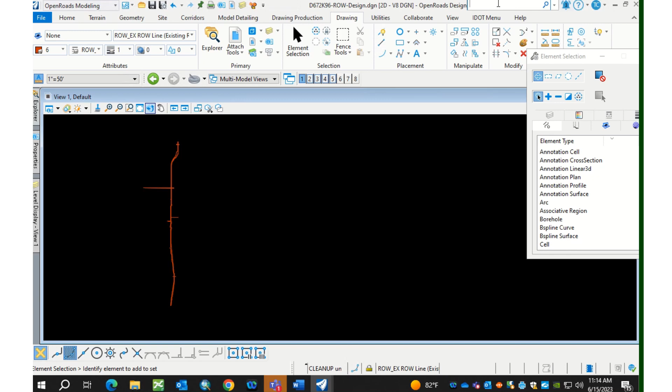All right, generally when I bring in the right-of-way, the lines aren't connected very well. So I found this tool from SS10, I went and looked for it yesterday. It's called Design File Cleanup, and it will help you connect all these lines together.

Generally the first thing I do is go into overlaps, make it a color I can see. Not that one, I make the weight nice and big. Same thing with the gaps, yellow and green. I usually start with one at a time.

So duplicates, hit apply. It will do nothing... alright, there we go. So there's a duplicate there, we can just delete that line.

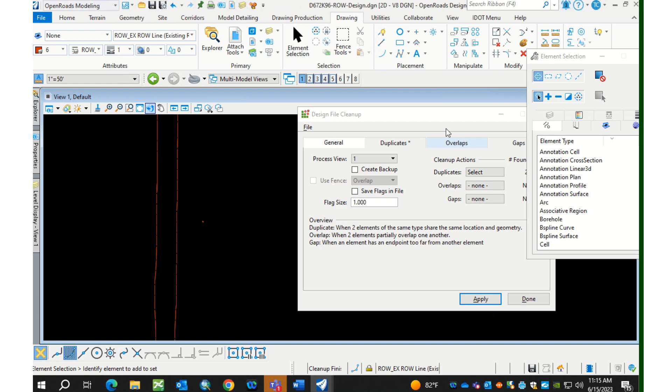Now if I run it again, it should go down to 0. That's done. Next one, overlaps. I flag these, apply. Just find all the green spots.

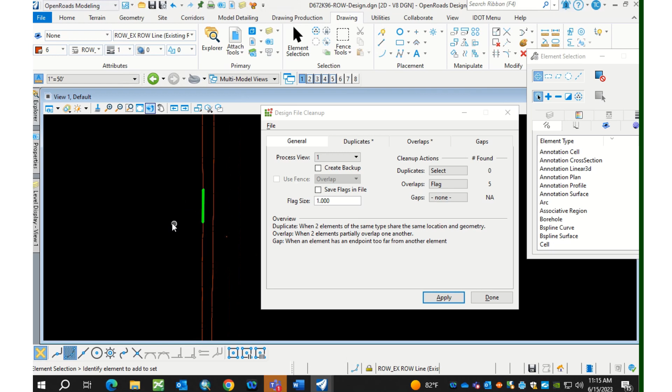Let's see here, I think that was actually a line I just drew. So that one's done, apply, you see that it's done. Go to the next one. I generally do this before I combine all the lines and everything.

So here's the trimmed intersection. They stick out pretty good here, so you can just kind of do them all, hit apply, down to 2. You get the idea.

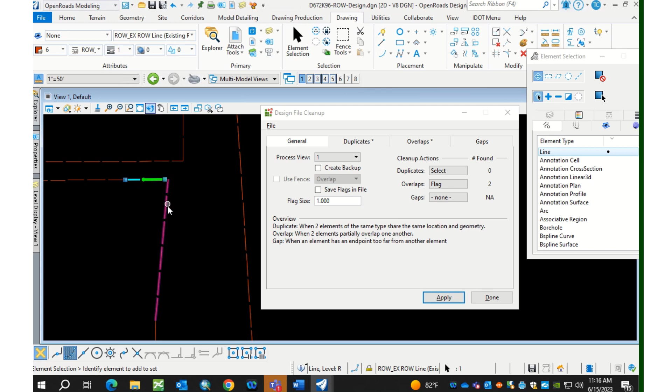Apply. That one didn't fix. Why not? There we go. That's why you got to check it.

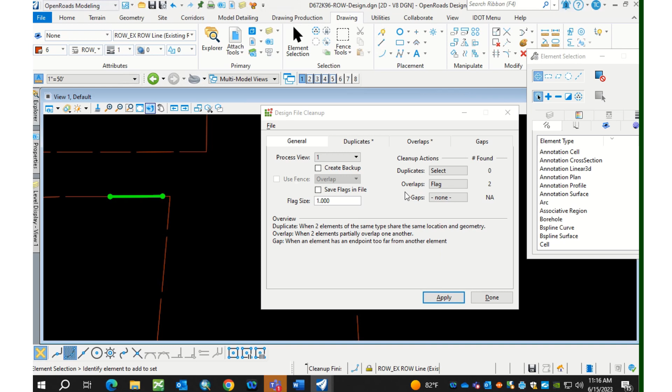Yeah, it seems like a great time saver instead of zooming way in. There's always going to be these gaps when you're trying to close something and it won't close. And then you go to the next one, flag it, apply. There's 18 of those. I'm not going to fix all those, but you get the idea.

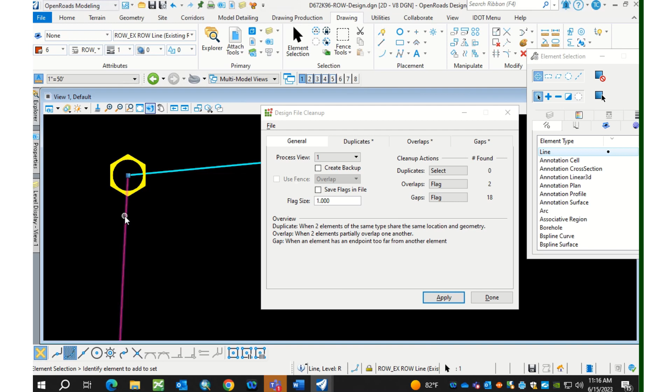Just come to each spot and find out why it's doing that. It could just be, sometimes there's like a dot there you just got to delete. Otherwise, just connect your lines there. Go through all those. When you get 0, you're good to go, and you can connect your lines without any problems.

Good? Any questions? Can this work on profile view as well? I've never tried it there. Okay, seems like something to try though. I don't know how well it works with the new geometry lines. Mostly the old CAD stuff is kind of what I use it for before I connect anything.

Any other questions I don't have answers to? Is it design file?

Perfect. Tom, anything else? All right, you got to choose between door 1, 2, and 3. A new car. Okay, so we'll go ahead and move on. Thanks, Brad, for that.

Okay, looks like on my outline the next thing I had was aerial images. For quite a few years now, the aerial images have been available. The whole state is flown every 3-5 years or so. And so you had this grid that you could bring in, and all the aerials were on the W drive. You find the grid number, reference it in, and then you had this nice aerial in the background so you could compare the topo to it, things like that.

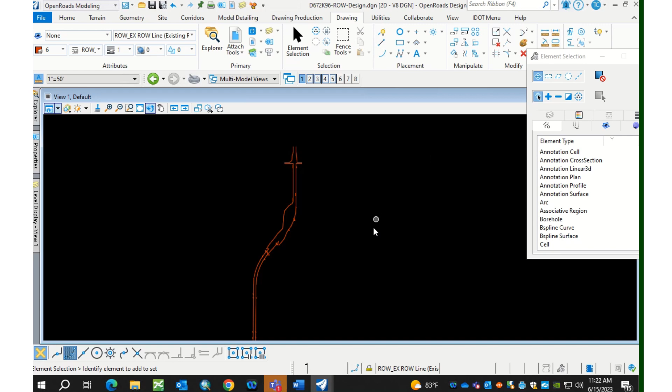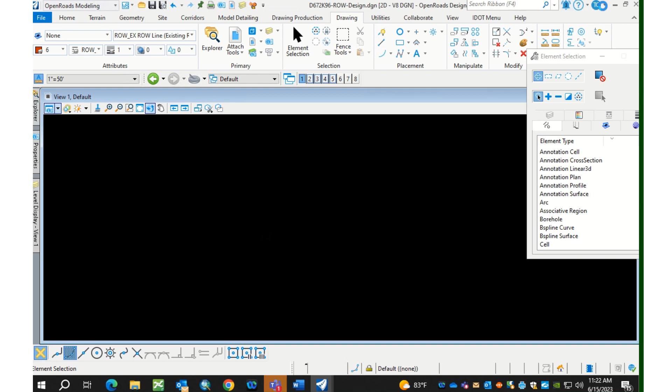Again, just like with a lot of things in ORD, in order for this to work, that coordinate system must be set. Because I'm using that template file, the coordinate system was already set, and Frank said he's going to take care of that for you guys. So that's nice, because that's always a pain trying to figure out which coordinate system to use.

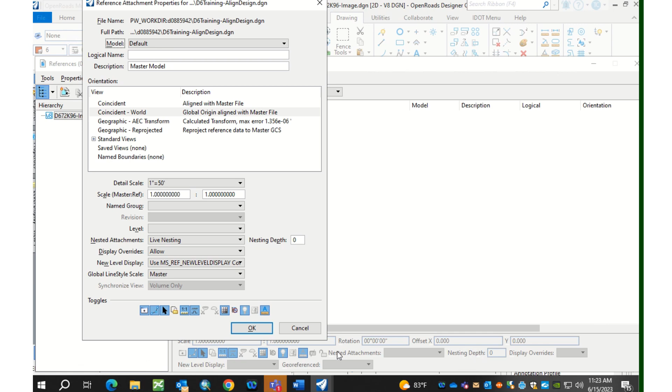Okay, and I usually just reference in maybe the alignment just to kind of get my bearings here. All right, so here it is. Could not be any easier, really.

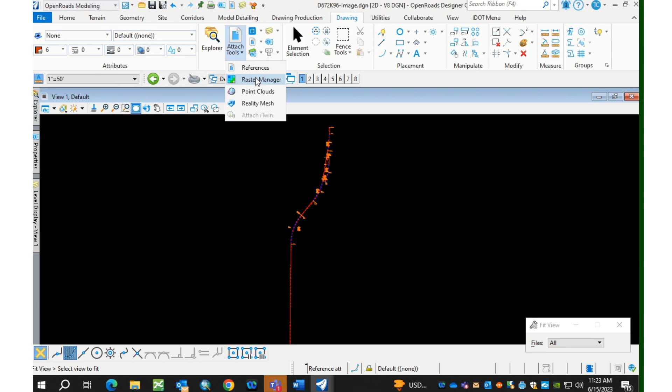I'm going to show you a couple different ways, but the first way I'm going to show you is to go to Raster Manager. File -- this is no different than image, right? You go File, Attach, and then normally you say Raster. All you do is drop down to Bing Maps.

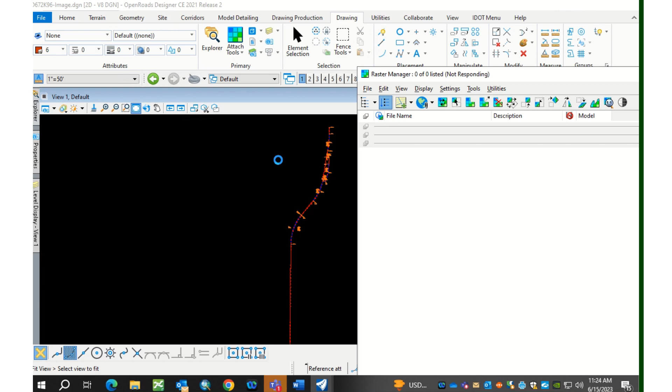And it takes a second to load. Then, just like if you were going into Bing, you know how you can bounce back and forth, it gives you an option of the image or the map, or image with labels or something like that. So you've got that choice on how you want to stream it.

The way that you would change that is right up here where it says Bing Map Layers. By default it's set to road, but most of the time you're going to want to set that to aerial. But even if you start off with road, I'll show you that you can change it after the fact.

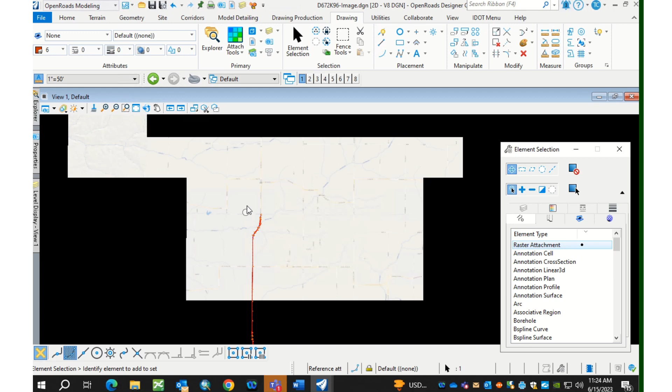So even that map background can be handy at times. Can you clip that? Can you clip it? Yeah, just around your jobs. I think so. Let's try -- right click, clip boundary, clip, and put apply.

What's my other option? Or maybe I just can't see it. Let's see, or maybe you gotta try fence or something. I thought I could -- is fence an option? Yeah, let's try it with the fence. I think it works, I'm just probably doing something wrong. For now, I'm just going to place a fence around it. And I think that was one of the options.

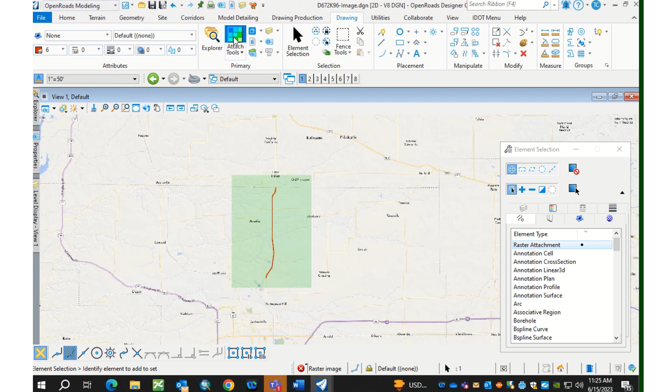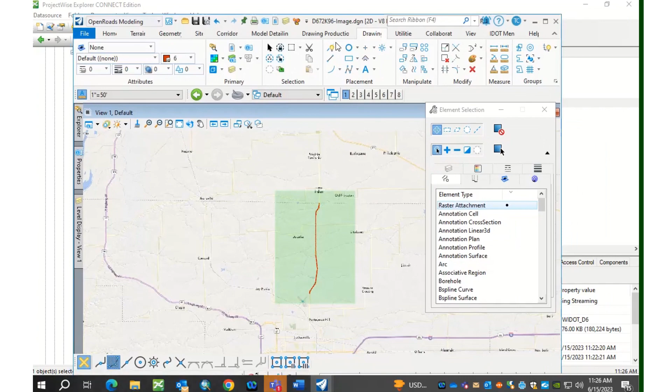Where'd he go? Oh, I lost it, where did it go? Is it hiding back there somewhere? It's behind the element selection window. Click another tool, like the look on the reference -- bottom, it's on the bottom. Oh, you see it? On the white part, on the bottom, on the right. There you go, right here, over, towards the center. Oh, right here, yeah, oh. Hey, this is real life -- sometimes that stuff does disappear on us.

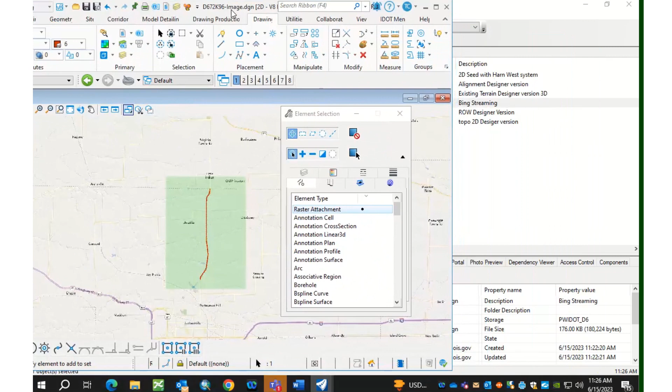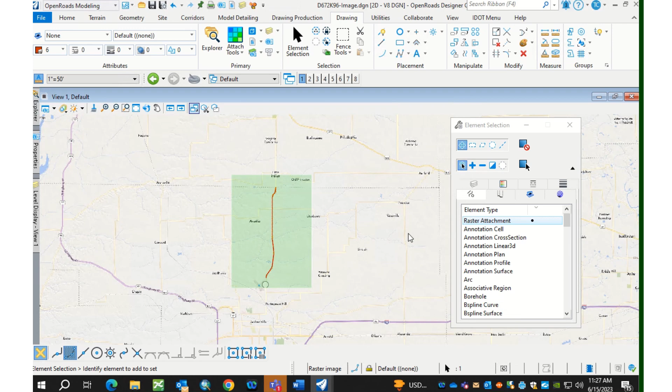Can you minimize view one, behind that? Jeez. No, that's okay, just so we can keep moving on. I could either -- this is, we should be able to find it, but since we're doing training, I want to keep going. I'm just going to get out and back in. Should set that recording up so I could go.

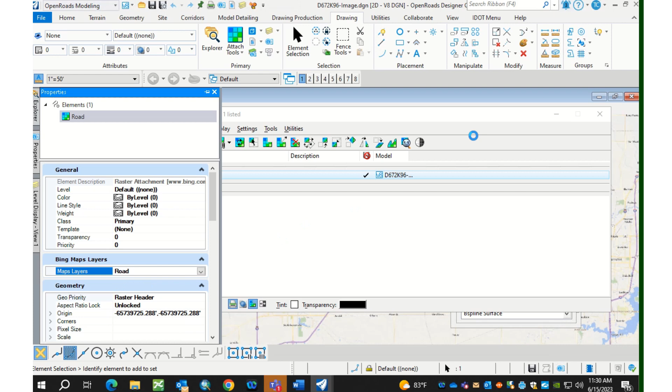And what you're going to see is it's really pretty decent. You can zoom in on something pretty close. This was available in the past, but if you got this close, it would just disappear - it was fine from further out. But this seems pretty decent, I don't know.

Got a quick question - how do you control the darkness? How do you set transparency? Gamma? I know, but using Bing maps.

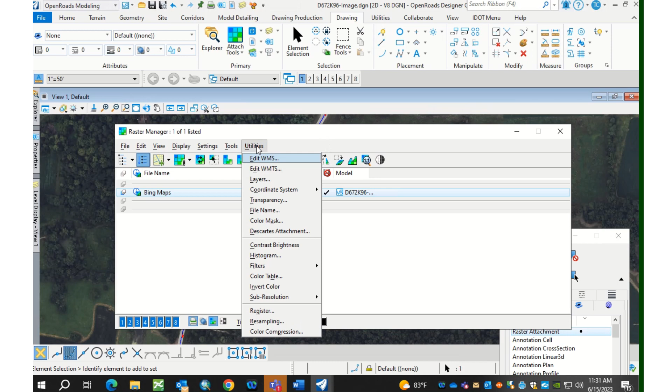Do you do it in properties? You do it right here in this raster manager dialog - this is one way of doing it anyway. If you had multiple rasters attached, you select the one you want to work with. You go to utilities, click transparency, then you have to toggle on transparent, and then you can set the transparency to be whatever you want it to be.

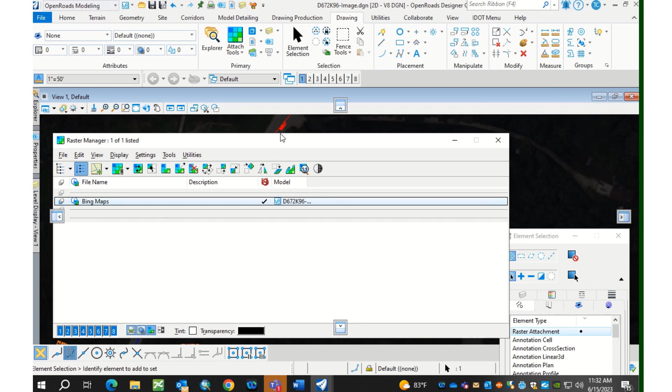I went a little too far with it, so you can't hardly see anything. But I think like 50% is decent sometimes. But yeah, you can just make it whatever you want.

But will that control both the printing and the view? For SS10, I'm not positive on that. I think so - if not, through Print Organizer you can also set the transparency of the raster.

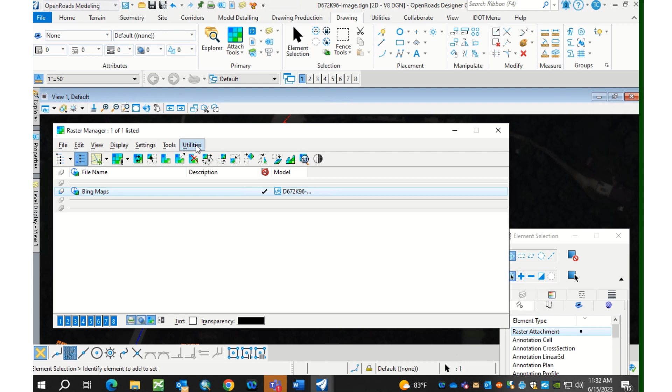Could you also do this in properties? I think so, yeah, let's try. Is that at the top? Let's see, let me go back and switch this. We'll find out.

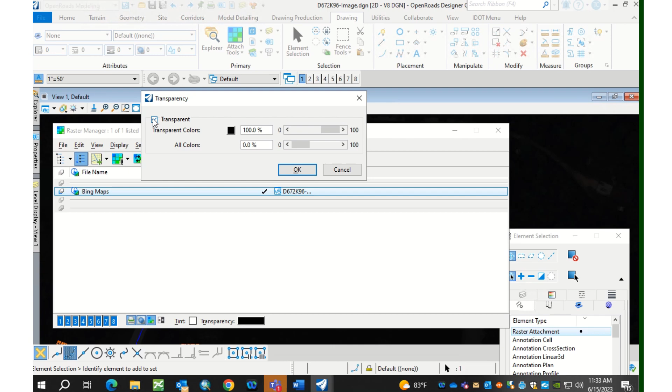Still transparent - yeah, it still seems transparent. Oh okay, it might just take a second to... yeah, I think it's okay now. Oh, it's because I have it set to 50. So I guess the answer is yes.

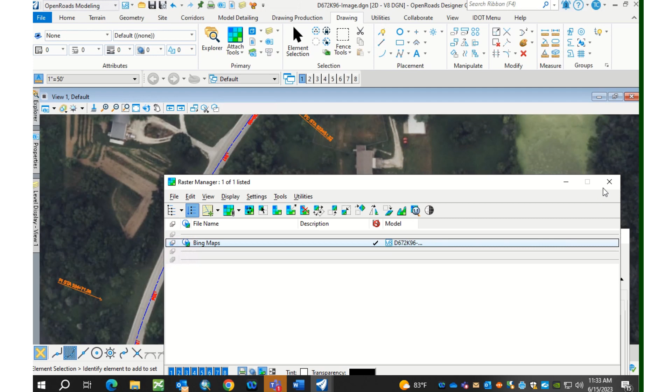There's zero. Yeah, that might even be easier to do it there. But Brian, does that necessarily lighten it up? I think display gamma - there's display gamma and print gamma on images in SS10. I don't know if it's on that.

Is that in the raster manager? This is where that information box is, you just have... oh okay, over here, scroll down. I don't know if it says gamma there. Just keep scrolling until you see gamma. The print gamma, display gamma, right there - see it.

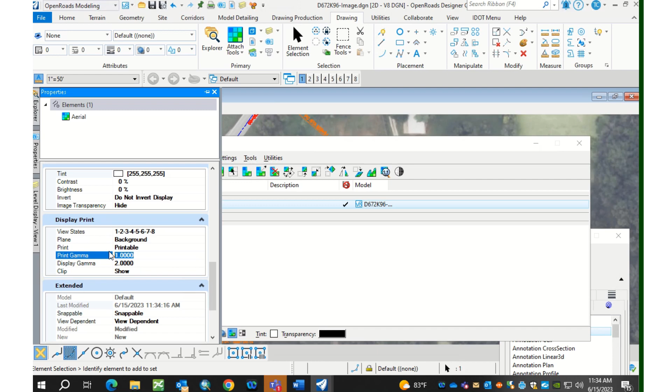You can change those, so make it higher, make it 2. Display, probably both of them - the one controls printing, the other controls display, so it makes it lighter, you can see it up there. Oh man, I can't believe I didn't know that. Thank you.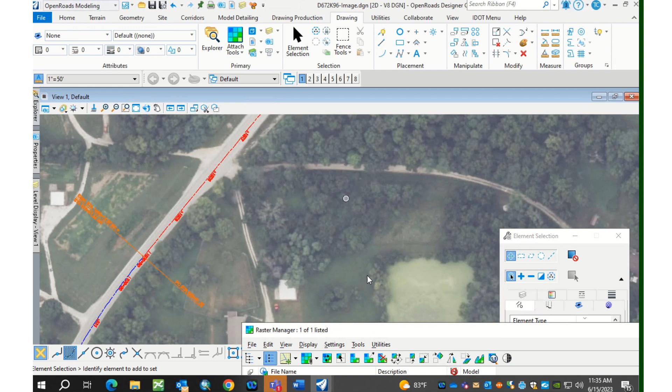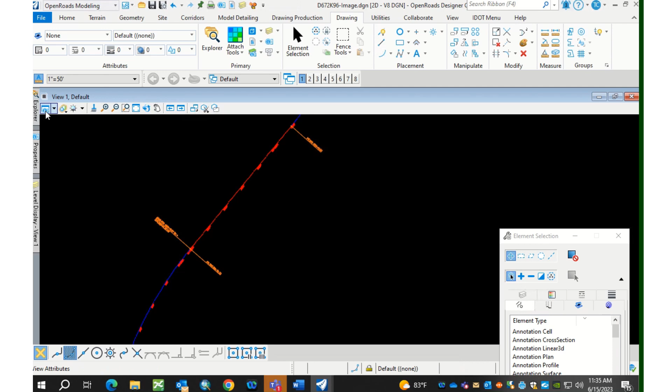Oh yeah, I guess I was going to show you one other - let me show you one quick way of doing it. I'll detach here, and sometimes I'll do that, like if I don't have one of those files set up and I'm somewhere and I just want a very quick temporary streaming in the background, I just go to View Attributes, and then notice at the bottom that this has been added. I don't think this was in SS10, but I can actually just go to my View Attributes, select Aerial, and it should... yeah, so that's like super fast to do that.

The only thing is I've noticed that I'll turn it on, I end up causing myself the same problem - I end up doing it in multiple jobs and then it slows me down. So I would say you use this quick little feature of attaching a stream, but when you're finished with it...

What is that? I've been idle for too long.

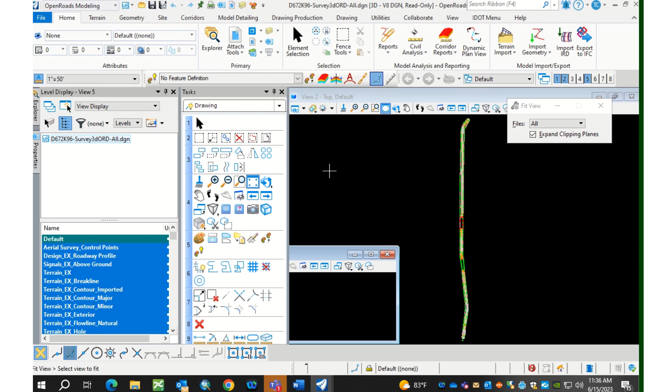That might be on the computer that I'm remoting. That's the other file, that one. All right, hang on, let me be active in that file real quick. Let's see, where was that at? Down here - no, I mean it was the other file, that surveys file. You haven't done anything to it in a while. Oh, I was still in that read-only surveys file. All right, I'll go ahead and just get out of it.

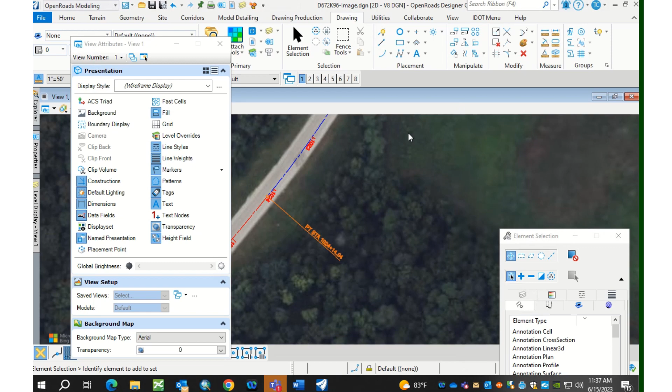Hey Tom, can you print with that background map there? Yeah, yeah, so it's pretty decent. Actually, this is something that I want to look into - this streaming is available.

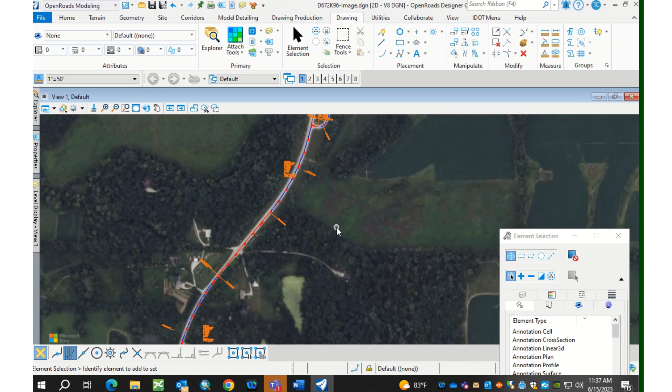It's very easy to do the Bing, but there's also many other maps, like a topo map, quad maps. There's a gazillion different types of maps available as a stream in addition to Bing. And I haven't done this yet, but I think you can also go to Raster Manager if you know what the link is to those maps.

And then you just go File, Attach, and you could point to it if it's in an image server, or I forget what they call this, web mapping service I think is what they're called. There's all sorts of streaming services available, but I think you do have to set it up in this little text file first. I'd like to learn about that, so I can't show you right now, but to me that would be super valuable.

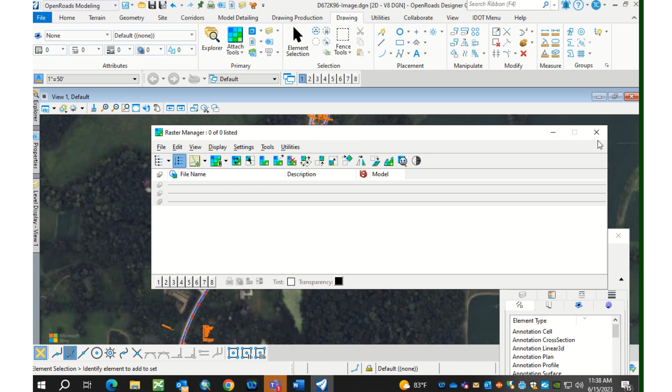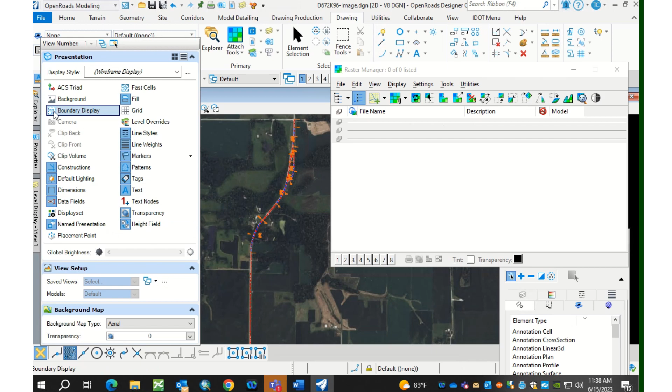Quick question - what about clipping boundary? Is that possible? Yeah, you can still clip boundary. That's right, I guess that's what I was trying to do earlier when I lost this thing. And I guess it doesn't show up here if I attach it through that quick way. So I'll go ahead and turn it off and reattach it, and we can try to clip.

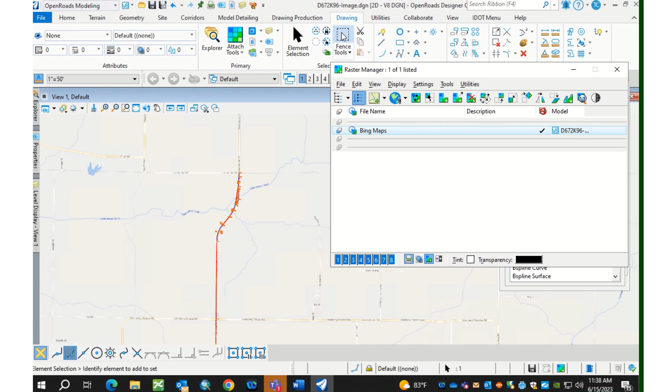All right, so let's try it as a fence. Let's see, yeah, I think I just go to... is it Edit? Yeah, clip right there. Clip, and then use fence. Clip boundary. Oh, click to accept, or click outside the fence maybe.

I think you have to select that. Let's see... oh, it says enter first point, so maybe you gotta redraw. It's not working. You have to hold it down when you do the block - click and then hold, and then make your... yeah, let's try that. Can I drag it? Yeah, just click and drag, I wonder. Or maybe just right click. Oh, you can try working off image.

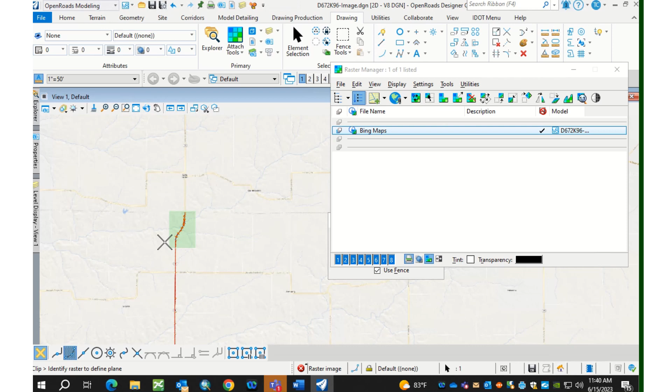I don't know, I think I'm probably not going to spend any more time on it. I'm pretty sure you can do it. Maybe you guys need to go back to your desk, give it a try, and then maybe send an email around to the group if you figure it out. I'm pretty certain that you can.

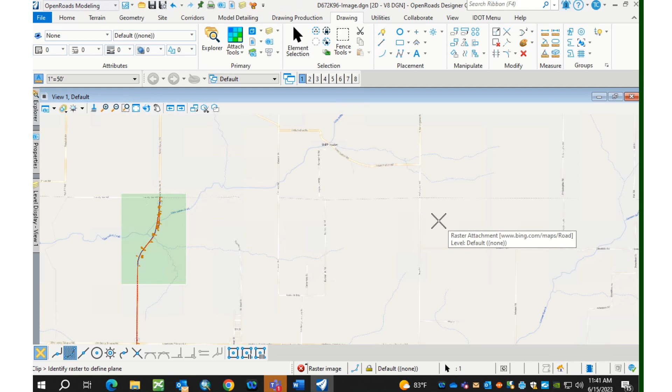Let's see, what do we got - 15, trying to see where I was hoping to get to plan sheets today. I don't think we're going to get quite that far, but we got like 15 minutes, so I think we'll be able to do a little bit of proposed work. Let's do that, then that'll probably wrap up session 4. For future sessions, maybe I'll go ahead and create these files in advance, now that you know how to do that, so we don't have to take time through the training. I'll just set myself up some templates first.

All right, so we're going to do some of the proposed line work, and we still use in ORD a file named design. So we'll go ahead and create that, and then we'll just do a little bit of the proposed work on this job.

We're actually going to do the line work for now using our smart line tools. What you'll see is that later you'll have other options for doing some of your line work if you choose to do this. Personally, I still normally draw in my line work myself, but ORD is set up so that you can run a template - we'll get into this later - it creates the model in the 3D view, and when it does that, it also creates those 2D elements, like your edge of pavement, edge of shoulder, all that stuff automatically created from the template, so you can use that.

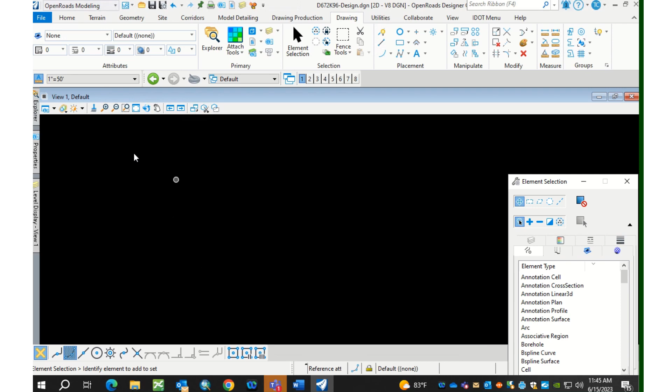I'm doing that individually. I think in class you may have learned a different method too. If you feel like you're referencing in the same files over and over, you can create a container file and then reference that container and set your live nesting. That's something new - we never used live nesting in the past, but you can set a nesting depth to, say, 2, point to that container file, and you can actually see all of the reference files. Did they cover that in class for you guys? So that's optional. I don't normally do that myself, but I see the advantage of it.

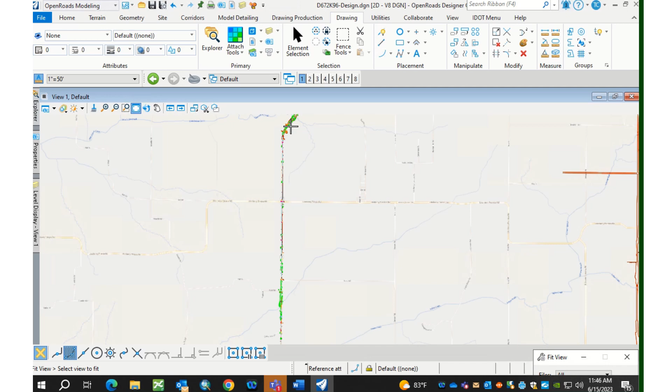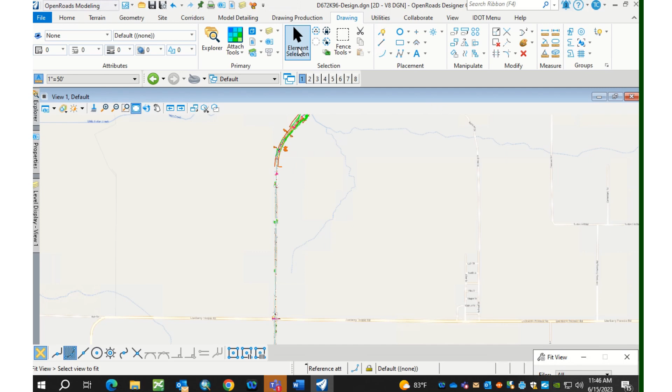In this case, I just referenced each one individually, so I'm not going to do any live nesting for this - that's up to you guys really. Even though I like having that image file referenced, most of the time I keep the display off, but I just like it to be there so I can quickly turn it on or off.

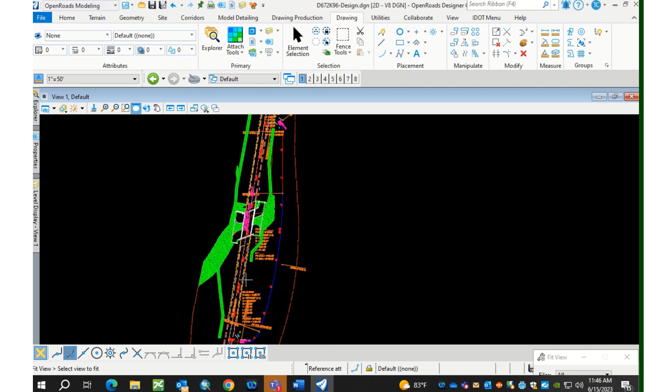All right, we don't have much time, but I think we'll just do a few - let's do edge of pavement, edge of shoulder, and maybe guardrail. So really, when you're first getting started on a project, you've got to think about it from a design aspect too, not just a CAD aspect.

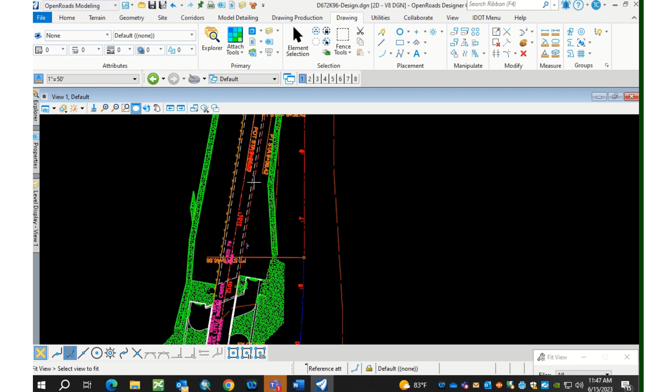So you are going to want to do your research. You may have wanted to start off with some typicals. You're going to research your old plans, see what the existing pavement width is, see where the existing HMA shoulders are, and you need to know: do I plan on doing any widening on this project? If so, that's how I'm going to draft in my edge of pavement lines - to the proposed, not the existing. So you kind of need to know that.

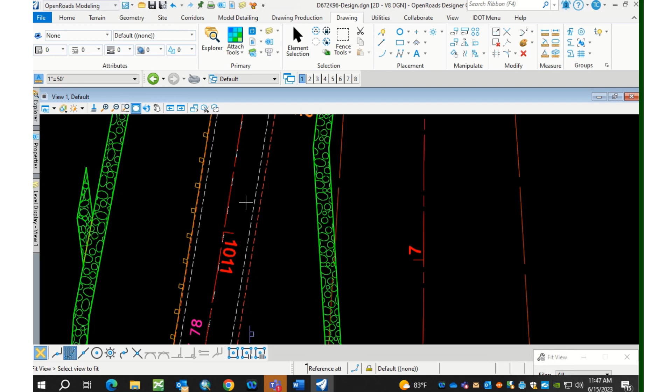In this job, it's probably not too unusual from a lot of jobs - it actually had multiple widths. At the beginning of the job, where I'm going to add gutter, the pavement's 13 feet wide; then the pavement's 12 foot wide, and through all the other resurfacing sections, the pavement's 11 foot wide. We're not doing any widening with the exception of the 12 foot areas. So it's really almost like 3 projects in a way. Like I told you in a previous session, this north section of the job was realigned in 2014, and they went with 13 foot pavement there up until, I think, the PT of this curve.

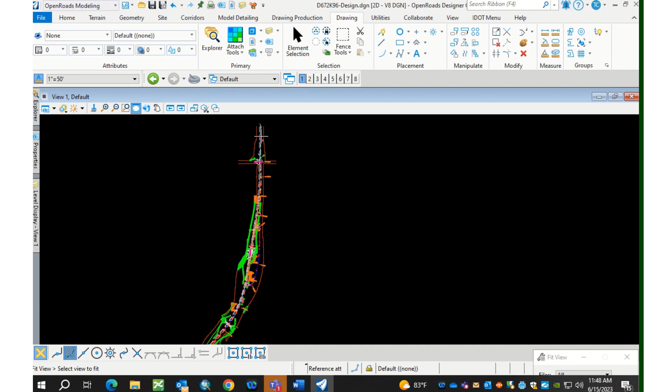So let's go ahead and start off with that. Sometimes I like to turn off some levels just so I can see a little better what I'm doing. Right now we might not want to see all this extra stuff, pavement markings, and even if I'm working on edge of pavement, I just like to keep it clean.

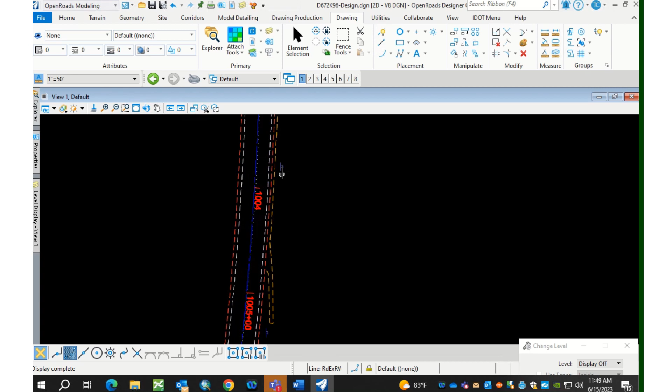Okay, so what we've got here is on this one side only - this is an existing gutter, and then you've got asphalt shoulder between the pavement, and on the other side of the road it's just shoulder, there's no gutter. But what would be the process of drafting in edge of pavement now that I know my pavement width is 13 feet wide? I'm going to turn one more thing off.

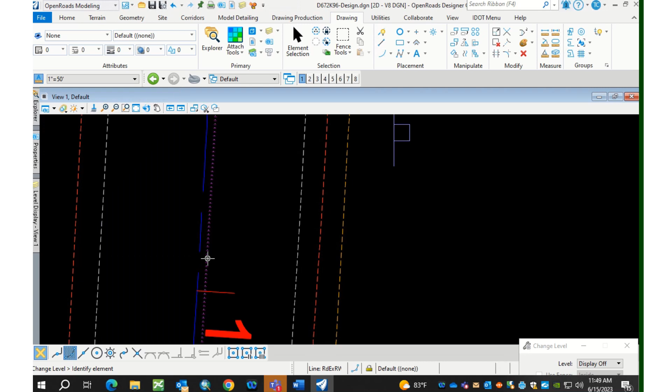Let's see. Even from what we talked about already today, feature definitions, right? So if you're going to draw anything, you know that you would need to, at the very least, set the level, weight, and color, right? We standardized everything. In SS10, there were various ways of presetting your level, weight, and color. Now in ORD, especially for the main items like edge of pavement, edge of shoulder, we typically use a feature definition, and that feature definition sets the level, weight, and color, all that stuff for us.

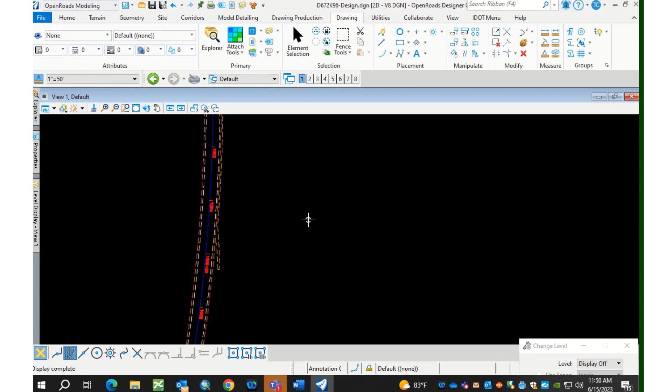One thing, if you've done any work in ORD, which you probably noticed, was you can't copy parallel that center line. You go to - well, you can, but in a different way. You would go to your MicroStation copy parallel, maybe in SS10, you'd say make copy, you would click on that alignment, but now notice nothing happens.

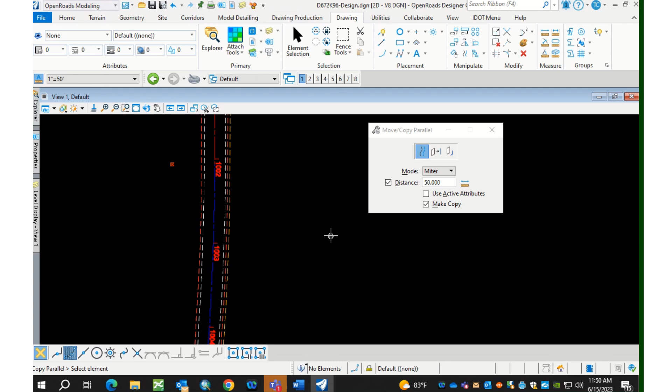So you can't do that anymore because that alignment, unlike SS10, is not an arc. It's not a microstation arc. That alignment, there is no GPK file. There's no coordinate geometry. That alignment has all the intelligence that the GPK would have had of that alignment, right?

So it's really not just a visual, a 3D line string. Well, it is 2D here actually, you can make it 3D, but it's 2D. But in any case, you can't just copy it parallel that way, and there's no draw transition command like you'd expect. Again, I'm talking Geopack now, but the best way to learn ORD is to forget about it, don't compare the two.

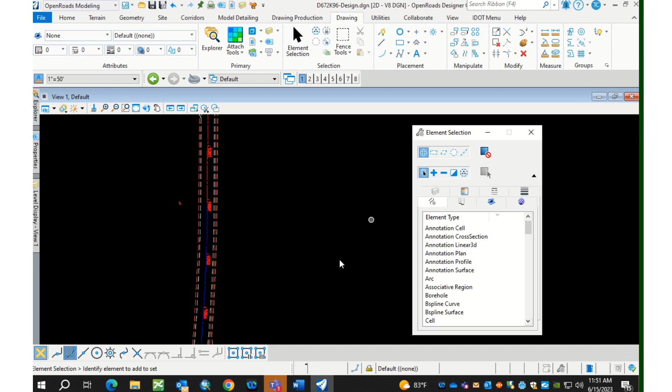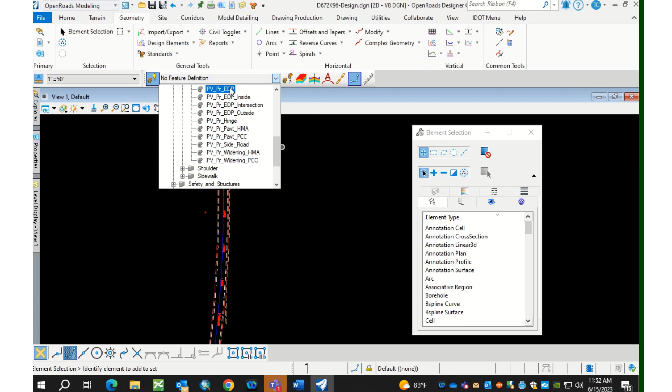It'll make you crazy. Just accept that ORD works this way, and you'll keep your sanity. So the very first thing we do is go to that feature definition toolbar, and I'm going to do edge of pavement first. So I'm going to make my active feature definition roadway, pavement, should be an edge of pavement right there.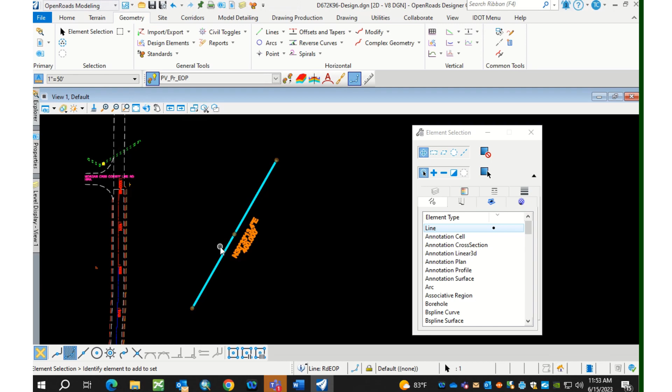We know these smart lines just work different than a microstation line, and it's not that these lines are replacing all of the microstation lines, not for everything. Just for the main items like edge of pavement, edge of shoulder, guardrail, those are the main ones, maybe sidewalk, whatever you think of as the main thing. If you're just closing off the end, like the job ends here, it's the butt joint, you could use a microstation line.

But keep in mind, if you're using both smart lines and microstation lines, this feature definition does not apply to a microstation line. So there's your microstation line, let's see what happens. So keep that in mind, because you're like, okay, I need to tell it what the level, weight, color is, all this. That only applies to smart lines. If you want to set up your level, weight, and color of your microstation lines...

Then it's kind of like SS10, or one thing. It's a little bit different in ORD that I do like - you use what's called these templates up here, I think they're called element templates. So for smart lines, you're using feature definitions, for other lines, you're using this. And there is a search in here, which I really like.

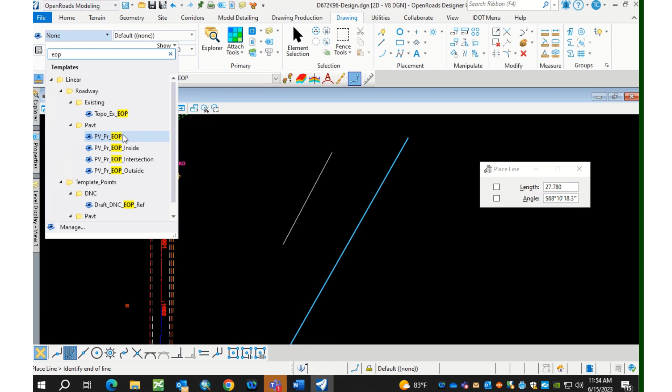So I could even type in EOP, which this is pretty nice. See, it took me right to it. And they've got it labeled the same as the feature definition, so it's kind of the same thing. So now when I draw a microstation line, it also has that right level, weight, and color.

Okay, so let's delete these lines and let's go ahead and draft in the edge of pavement for this project. The way I need to do that, once my feature definition is set, I go to the Geometry tab and I select Offsets and Tapers. There's a couple different versions of this, and you'll end up using them all, but one is to offset the entire element, one's a partial, one's a taper, one's a ratio.

So it really depends on what you're doing here. Like in this case, I had mentioned we have 3 different pavement widths, so I'm probably not going to want to copy parallel the whole thing, right? I'm just going to want to do part of it, and this is really different. This is going to take you just a little while to get used to, because even if they talked about it in class, you're probably going to need to hear it a couple times to say, what do you - this is so different. It uses something called, what's the word?

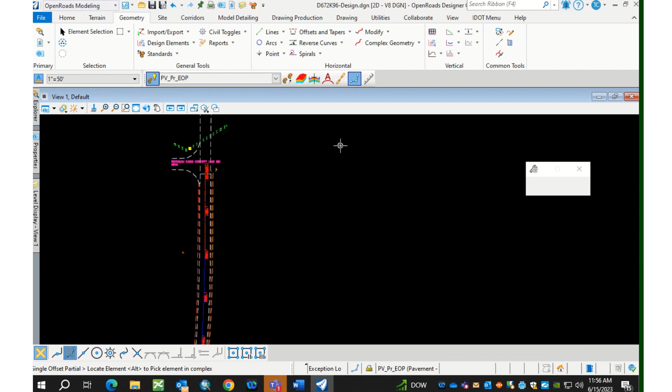Increments, I think. In any case, let me do it, I can show you easier than I can explain it. Single offset partial. I said my width was 13 feet. I can turn on mirror here, yes or no. And I need to select the alignment that I want to be parallel. And then you can see there's two places I can accept information.

Over here in the dialog or in the heads up display that's attached to my cursor. And then I also need to tell it where I want to start this line. And what's maybe a little different about this than what you're used to - normally if you were copy paralleling a line, you would try to get it perfect the first time so you didn't have to go back and trim it or anything, probably.

But with this, you don't really think that way necessarily. You normally want more than what you actually need, and I'll show you later why that'll be important. It's because when you trim these lines, there's still going to be a line underneath that line. Let me show you what I mean by this. It takes a while to grasp this particular concept.

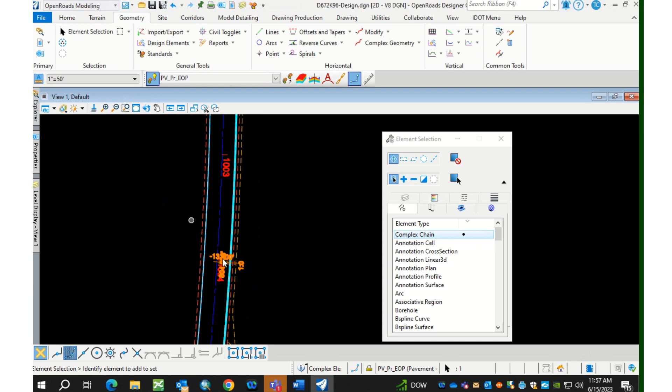So I'm going to start at the beginning. I'm going to go beyond that PT, just a little bit beyond, giving myself a little bit more than I need. I'm going to say yes to mirror. And so now I see that line out there, which is nice. One thing I really like about this is when I select it, see how it automatically tells me what that offset is, which to me is pretty nice.

If I want to change it to something else, negative 15, I just change the width. That's pretty slick. And if I'm going to change it and want the whole thing to equally move over, I need to make sure I selected that middle choice. Otherwise, it's only going to change one side, and then I'll end up with a line that's not parallel.

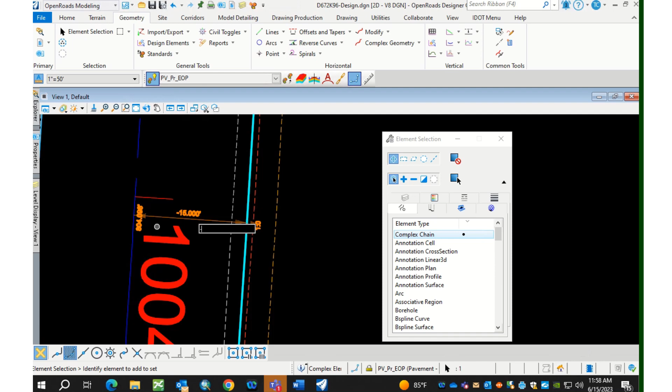Okay, so let's see, did I go through this section here? Oh, you know what, this actually goes down to this PT. I need to extend those lines. Let's see if I can.

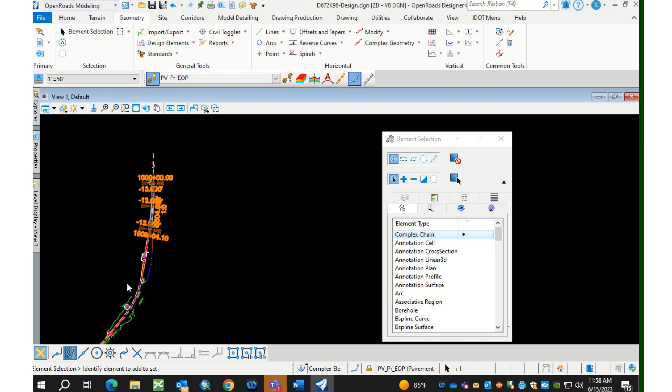Wasn't planning on doing this, but let me show you maybe some more here. So I just drew on that line. I drew it too short, right? So you'd be like, okay, am I going to go back? Am I going to redo it? What do I need to do?

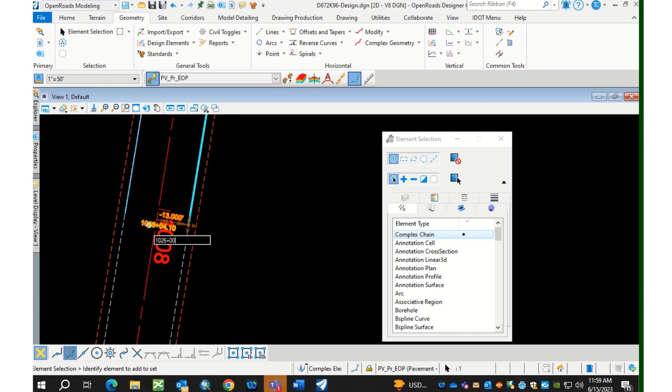But this is pretty nice because notice it's showing me what that ending station is. So one way to extend it to where I want it to go is I could just type in that station, whatever I wanted, and say okay. And then it just extended the line parallel to the alignment down to that station that I typed in.

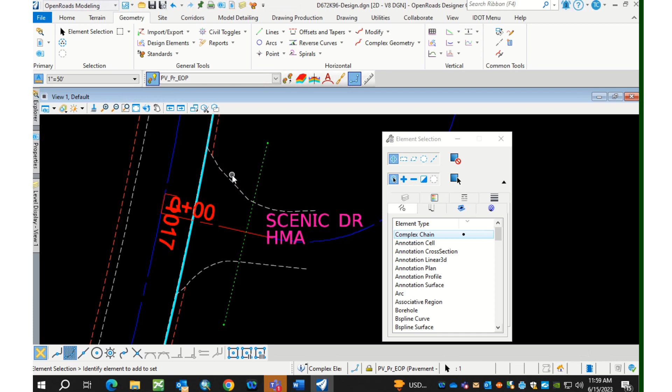But let me just leave you with this, and this is the part that I'm saying is a little bit different here. See that line that ran through like a side road? Let's say you don't want that line to run through the side road. So here you're going to use MicroStation Tools, partial delete.

And it's going to appear that I'm partially deleting this line, but I am, but I'm not. All right, I'm going to click on it here. I'm going to take it up to here, and I'm going to click on it. You're just hiding it.

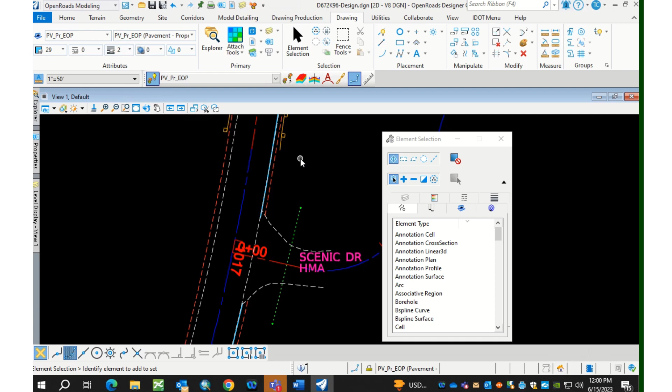So now what we have, if we were to look in our Explorer that shows me all the elements in this file, you'd see that I've kind of created multiple elements now, because watch, if I hover over that edge of pavement, it's still there. You just can't see it. If I come up here to this line, this little, I'll have to find out what the official name is.

I think they're called like increments or something like that. Interval, yeah, thanks. Brad, we're going to have you up here teach. That's what I've been saying. You guys need anything about CAD, you know your man right back there.

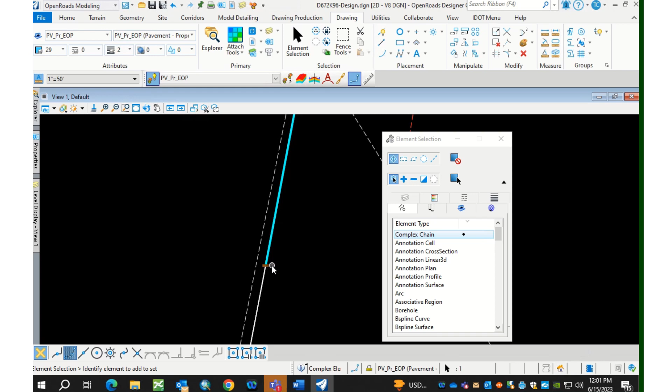Okay, so they're called intervals, but notice when I click on that interval, it has that little, what do you call that, Brad? That little ending piece? Manipulator. And I can hold down on that, and I can move my cursor, and I can adjust what I'm seeing there.

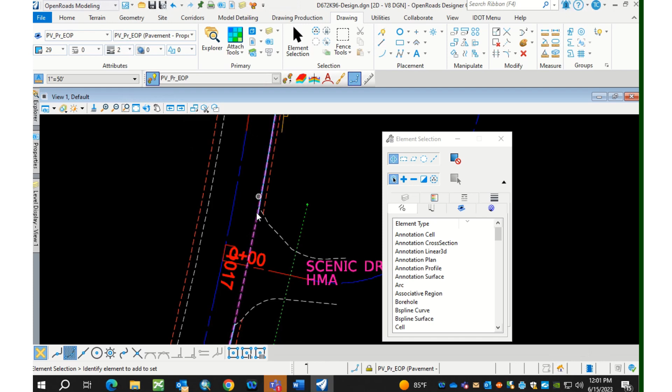I guess the whole reason why they do this sort of thing is, see, all those intervals are still tied to that line that's underneath it. And so if I click on that line and I zoom out, see, it still has all that same functionality that it had before I clipped it.

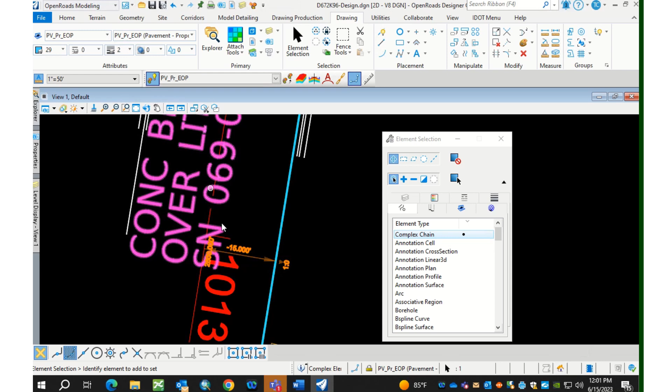If I change that edge of pavement now, not only is that line underneath going to move over, but even the intervals that are tied to that line move with it. So I think that's one of the reasons why it's done that way. In any case, it's definitely different than what we're used to, but you'll get used to it. I've definitely gotten used to it. I like it now, but having used GEOPAK forever, it did take me a while to get used to it.